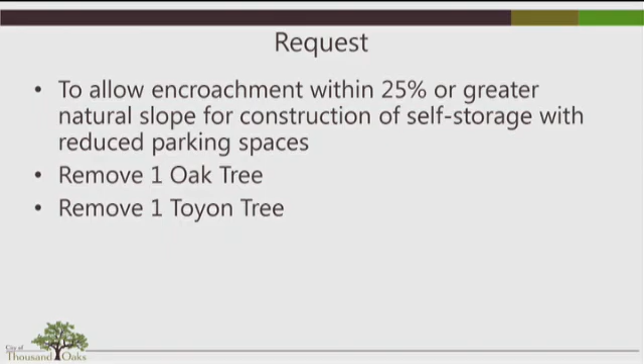This is a vicinity map showing the general location of the project. The site is located on the south side of Willow Lane between Hampshire Road and Conejo School Road. The 101 freeway is just immediately to the north of the project site.

This aerial photo shows the freeway on the north side of the property, where my mouse is right now. There's a children's facility to the east side, which is a school. On the south side is a vacant residential property, and to the west is another self-storage facility on a 3.52 acre lot. The storage building has a total square footage of 69,452 square feet.

This was approved in 1985 with no waiver of municipal code or other applicable guidelines granted. There are 3 utility poles on the property, numbered 1, 2, and 3. There are 4 oak trees.

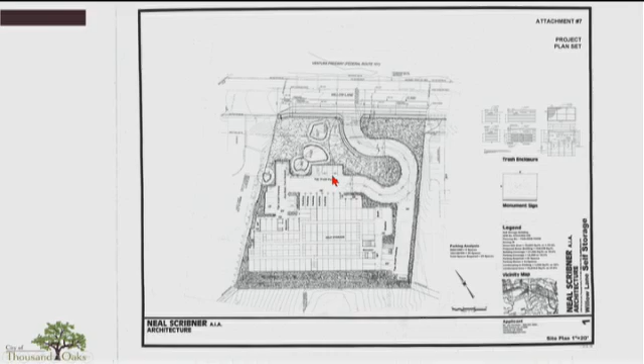This next slide shows the building elevation, proposed elevation. It will have a gray stone finish and 4 windows along the front facade of the building. The building overall has a rectangular shape.

This shows the grading plan for the project. There are step retaining walls on the driveway. These step retaining walls are required because a single wall, the required retaining wall here, would be about 14 to 14.5 feet high. So the walls were broken up into not more than 6 feet in height, with a planter in between.

This slide, along with the next 2 slides, will show a photo simulation submitted by the applicant. This one depicts a view from the northbound side of the 101 freeway. This is pretty much almost across from the subject site, the project site.

This next slide depicts the proposed facility from the southbound side of the 101 freeway. The building to the right is the PTS Furniture. The area between the proposed building and the PTS Furniture is where the existing self-storage facility is located.

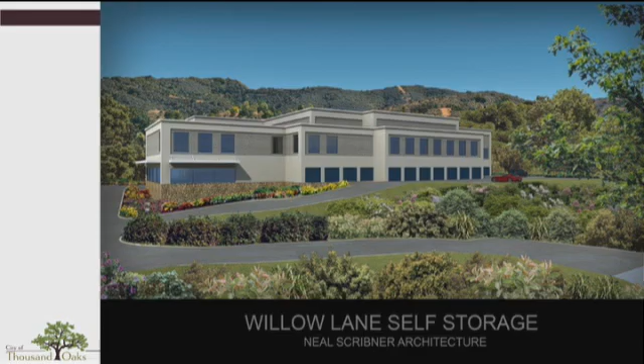As a background, the project site is zoned M1, and it's 1.63 acre in size with 3 single-family dwellings. As mentioned earlier, there are 4 oak trees on the site, 1 toyon, and another oak tree located within the right-of-way. There are 3 power poles, as we mentioned earlier.

In 2009, the City Council initiated the General Plan Amendment 2009-70407 at the applicant's request and authorized concurrent processing to allow the applicant to proceed with the General Plan and Land Use Amendment concurrent with a medical office building application. In 2014, the applicant requested to proceed with the General Plan Amendment and the zone change, so the zone change on this property was changed from RE to M1.

In early 2018, the property changed hands, and the owner, the current applicant, is now the new owner. The proposed building will have 100,138 square feet of building with 23 proposed parking spaces. By the way, the facility will have between 700 to 800 rental units.

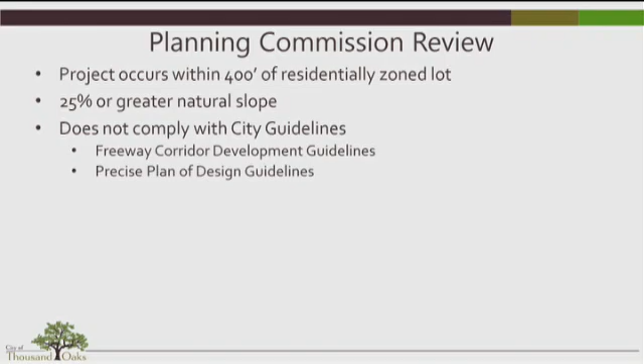Staff made an analysis of the project against the freeway corridor guidelines. The project does not comply with 7 subsections of the said guidelines, pertaining to silhouetting, extensive grading, visual interest, visual impact, facade exposure, building scale, and massing. Each of these subsections have been quoted in your staff report. The following slides provide an analysis of the project for each subsection.

For silhouetting, this is a picture you've seen before. The property is identified by 2 approximately 40-foot high power poles. The grading activity will lower this site by an average of about 20 feet. The building has a maximum height of 45 feet, and using the poles as a reference, it will be visible at approximately more than half the height of the poles. The building will not be blending into the natural backdrop because it will be sitting up around this area, and will have an adverse visual impact on the aesthetic conditions along the 101 freeway.

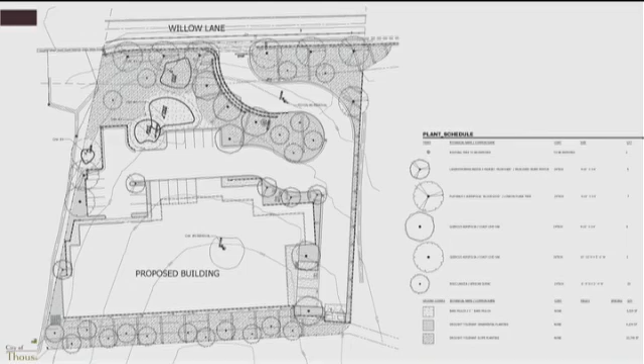Facade exposure. Section A5 requires buildings to be oriented at angles to the freeway to reduce the exposed facade, providing additional open space for innovative landscape designs and opening up views from distant features. The proposed building sits parallel to the 101 freeway without any feature angled to reduce the exposure. As mentioned before, the project does not provide additional open space for innovative landscape design to reduce that exposure. The landscape area is very narrow to support healthy growth of the trees.

Building mass and scale. Section B1 of the guidelines requires building architecture to make creative and innovative statements, but not appear as an imposition on the landscape. Buildings must be designed at a scale and manner sensitive to the terrain, reflecting integration of the architecture and topography. The proposed building has a height that is massive and imposing over the existing landscape. The building design is not sensitive to the site terrain and is not adequately integrated into the topography. The first and second floors should be stepped back to reduce visual massing.

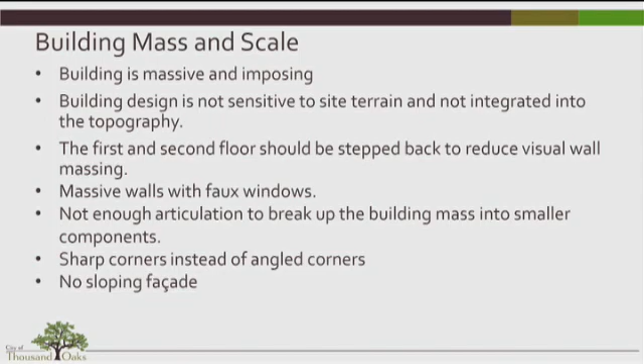Building mass and scale is part of the precise plan design guidelines. Section H1A of the said guidelines states that nondescript or boxy buildings without any recognizable architectural character, style, or detail are discouraged.

The proposed building, as you saw earlier in the elevation plans, is pretty square. It's got a lot of sharp corners and lacks architectural character. The faux windows look flat against the building facade, and the building lacks interesting features such as roof or any other articulation.

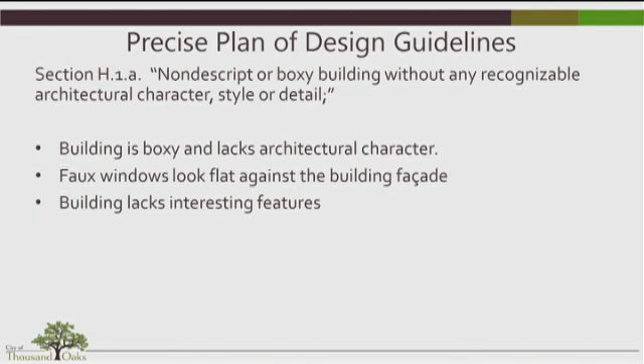As for the municipal code standards, for parking standards, commercial buildings that exceed 50,000 square feet require 2 loading and offloading spaces by code. The project requires 24 parking spaces. We calculated these spaces using the warehouse use as the parking demand for this type, which is 1 per thousand square feet for the first 5,000 square feet, so that's 5, and then 1 per 5,000 square feet for the remainder. That's how staff came up with the 24 spaces.

This project provides 23 parking spaces, which is one short of what is required. Staff does not support a waiver of the parking standards for the following reasons.

The project is too intense compared to the adjacent facility. The adjacent facility sits on a property that is almost twice the size of the subject site, 3.52 acres versus 1.63. The building next door has two-story and single-story elements.

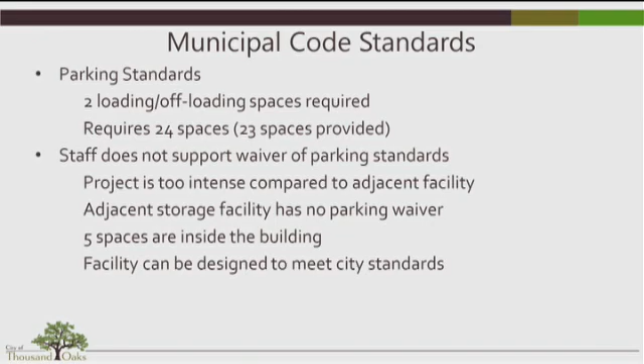In addition, there are no parking waivers granted for that facility. The building next door is 30% less intense than what is being proposed, on a site that is almost twice its size. There are also 5 parking spaces being proposed within the footprint of the building. Since the existing residences are being demolished, staff believes the facility can be designed to meet city standards.

As for grading, the 25% or greater natural slope occurs towards the rear of the property. The total natural slope area for the property is 12,570 square feet, which is about 17 to almost 18% of the site.

100% of the natural slope is being affected by this grading activity. Portions of the site will be lowered by 20 feet or so. It will require 31,750 cubic yards of cut and a net export of 31,500 cubic yards, requiring 2,250 truck trips using a 14 cubic yard truck. Off-site grading on Willow Lane will occur for driveway access, requiring an encroachment permit from the city.

Environmental review: this qualifies as a Class 32 categorical exemption under CEQA Section 15332, which is infill development, for the following reasons: it's consistent with the general plan designation, it occurs within city limits, and it is less than 5 acres in size.

The site has no value as a habitat for endangered, rare, or threatened species. Approval of this project would not result in any significant effects relating to traffic, noise, air quality, or water quality. This site can be adequately served by all required utilities and public services.

The proposed building is not physically suitable for the property. It does not fit, as indicated by a need for a waiver of the parking standards. In addition, the project proposed does not comply with several elements of the city's freeway corridor guidelines and the precise plan of design guidelines.

As we pointed out in our previous slides, the project also requires extended grading, altering the natural topography. The building will have significant visual impact because of its bulk and massive appearance. It lacks angled corners and sloping facades to break up the facade into smaller components. The project does not provide ample landscape area to reduce its visual impact from the 101 freeway.

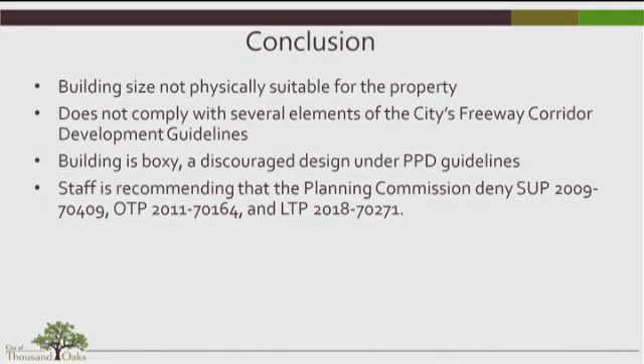For this reason, staff believe that the project will have an unmitigated, significant visual impact. Therefore, staff is recommending that the Planning Commission deny SUP 2009-70409, OTP 2011-70164, and LTP 2018-70271. That concludes my presentation, and staff is available to answer any questions you may have.

Thank you, Mr. Chua. That was very thorough. I appreciate that. Are there any questions, Commissioner? Thank you, Madam Chair, and I'll also add my thanks, Mr. Chua.

I appreciate very much that as a city we have architectural guidelines, and I very much appreciate your report that lays out where the project is in compatibility with those guidelines and where, as currently constituted, it is not. So thank you for that. I just have two questions, quick ones.

The first is that you mentioned there is a right-of-way in front of the property that is not part of the applicant's property. My question is, who owns that land? That portion is owned by the city. So that driveway that currently goes up to the property is city land? Yes, it is.

My second question has to do with two areas you touched on in your report. The bigger one is a public safety question having to do with brush clearance. There are areas where you mentioned relatively narrow strips around the proposed building, and this is problematic both for potential growth of future trees, but also for brush clearance, in that the applicant would be required to offer easements to adjoining property owners to do the brush clearance.

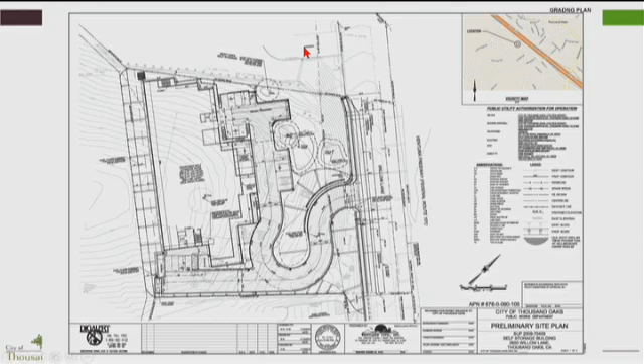I noticed we had some materials before us. I'm assuming this was from the applicant and not the city? Yes, it is from the applicant. Have you seen these at all? Yeah, I've brushed through it.

Aside from the people here to speak presumably later, did you get any neighbors' comments, any involvement from the public as to this application? I spoke to an individual who represents the Westlake Storage next door, and he's concerned about the grading. We initially spoke to it, but he did not give me any written statement about this project.

Is there any concern by virtue of the fact there is a public storage next door? Did that go into your evaluation at all, the possibility of another storage facility next door? No, this project is being evaluated on its own merit, not because of the presence of a self-storage next door.

And lastly, in your conclusion on the written documentation, you indicated that to the extent we would support this, we would need to establish findings to justify approval. Is that from a factual standpoint, or what kind of findings would you be looking for?

As mentioned in the staff report, the Freeway Guideline Corridor Resolution standards can be waived by the approving authority, either the Planning Commission or the City Council. So if the Planning Commission decides to approve this project, they will need to provide findings that support the project. They will state what waivers are being granted specifically, and indicate that the project either complies or waivers are being granted in certain aspects of the project.

As far as the height of the building is concerned, I apologize for that. That 45 feet is incorrect. I simply went by the project plans on the screen, which indicated 45 feet, and I went with the worst case scenario at 45 feet. So for the record, I'll correct that it looks like it's 27 feet plus 6 feet, or 9 feet, so that's 36 feet.

As far as the PTS furniture, I'll give a general answer to most of the buildings shown by Mr. Scribner in his submittal. The one thing not being mentioned is that this site sits much higher than the surrounding properties. The PTS furniture, the Westlake Storage, the Lowe's furniture, Lowe's particularly, is sitting on a previously graded pad. The Sage Mountain project, approved by the Planning Commission a while back, sits on a drainage that was filled to provide the pad for it. It's not a case where a hillside was graded to reduce the height of this pad, which is against our freeway corridor guidelines.

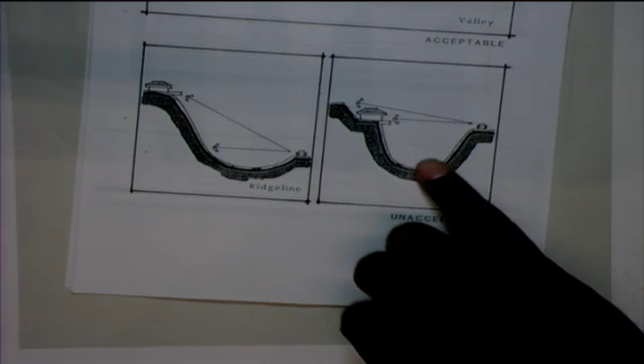In Mr. Chua's presentation, he showed a section of the grading plan showing a distinct portion of the hill being removed to create a pad for the building, parking, and driveway facility. As you can see in the guidelines, that's most like the diagram showing unacceptable development along the freeway corridor. The whole purpose of the freeway corridor guidelines is to maintain the hillside and natural view in their current state to provide visual interest. If you're altering the hillside, that's what we're trying to get away from.

And the architecture for buildings in this particular area is supposed to be designed to complement and enhance the hillside, meaning they step up.

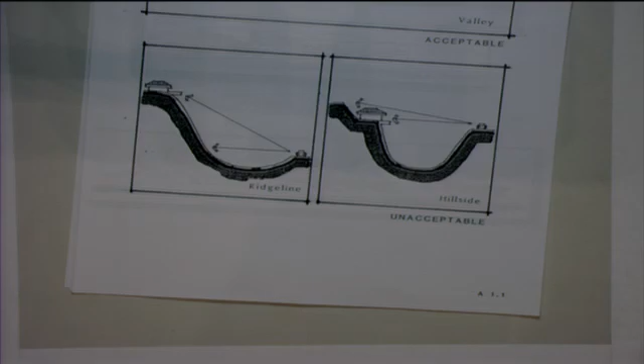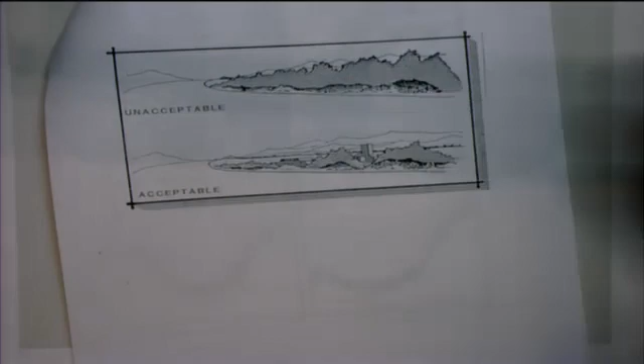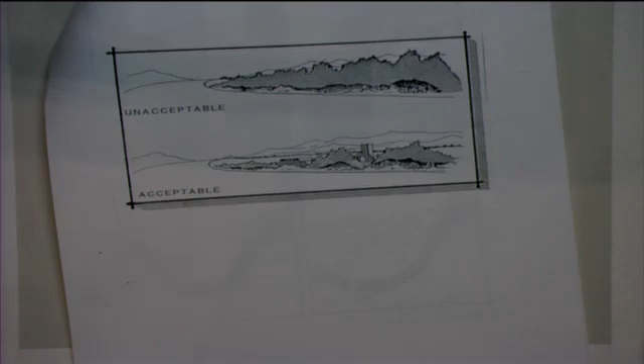One additional diagram you saw in the presentation, which I believe the applicant provided in your material, shows landscaping. What is pictured in the top portion is unacceptable because it blocks the hills. The landscaping planted along the freeway corridor is not intended to mask the hillside. In the acceptable portion shown below, you have landscaping but you can still see the buildings. The point is that landscaping should enhance the development as part of the architectural design, done in such a way that you can still see the hillside with the building and the landscaping, without cutting into the hillside or masking the view.

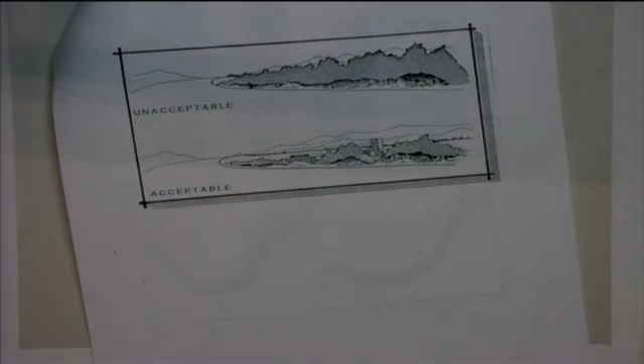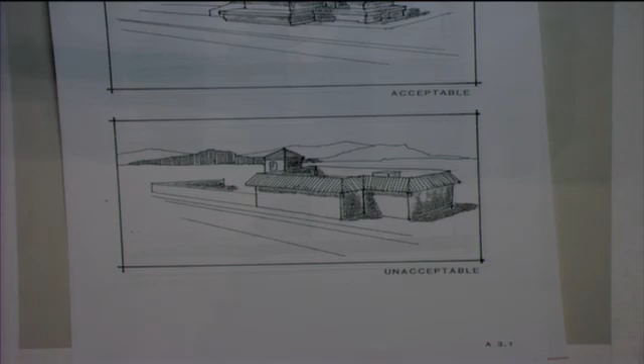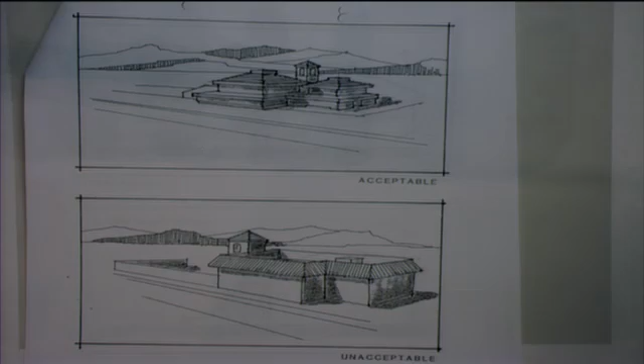Mr. Chua went into great detail in terms of architecture. Towards the bottom of this image, it shows a boxy-like architectural style, which Mr. Chua depicted as unacceptable for the freeway corridor. What is acceptable is shown towards the top, where you have a building with a wedding cake concept that steps back at each stage, providing architectural articulation, with a roof structure that doesn't mask the hillside behind it. These hillside guidelines are intended to go above and beyond what you'd ordinarily have in the code, given the highly sensitive nature of this particular location.

There were a number of projects mentioned, such as the Lowe's project. That is visible from the freeway, but as you drive by, you see the hillside in the distance. The Lowe's site was also previously disturbed—there was a previous development there that was removed, and Lowe's is being built on that. In terms of encroachment upon the hill, it's a very small portion at the rear of the building, which is also at the bottom of the hill, so it didn't change the visual character of that particular neighborhood.

So those are some of the differences that Mr. Chua pointed out in his staff report and presentation, and that he brought up in the rebuttal to provide context to what you're reviewing here this evening.

Excuse me, Mr. Parker. Can I ask you to show me one thing while you're up there on the overhead? I just want to be clear about that adjacent parcel that the owner would like to move the dirt to. Can you show it on one of the diagrams, one of the site plans, so I can see which parcel they're talking about in relationship to the one we're talking about now?

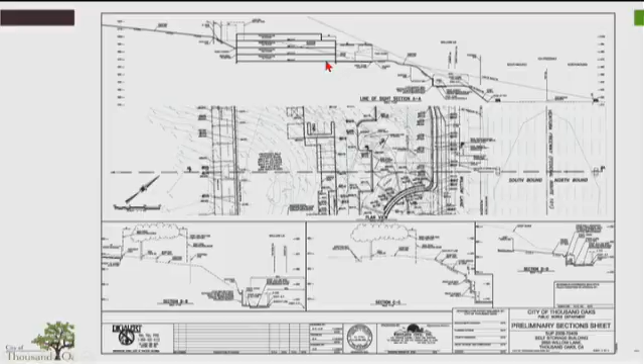So they're going to drop probably as high as 30 feet back here, 35 feet on this side, and about almost maybe 10 feet here. So I average it out to about 20 feet. All right, but you're characterizing, even with the 20-foot reduction, that it's still higher than the surrounding properties? Yes, it is. Right, okay, thank you.

And then also, if you're not able to answer this question, please say so. I'm putting you on the spot as a tree expert for the moment, but we've talked a bit about trees, and there's some lack of clarity as to the size of the trees that would go in, whether they're 24-inch or 72-inch box, and maybe it's not decided yet. But whatever the size of the box, are you able to estimate how long it would take for the trees to reach the height shown in the simulation provided by the applicant? No. Okay, I appreciate that.

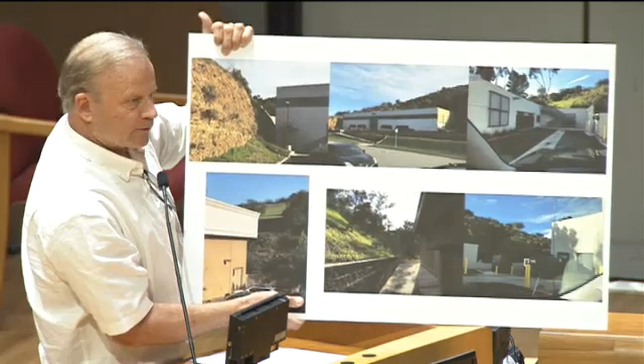Around the corner, there's a building here, a concrete tilt-up, and you can see it's cut in. This is like 30 feet tall here, and it's cut into there. This is around the corner on Conejo Ridge, but it's right there, and it's backed up to us. We're right behind here.

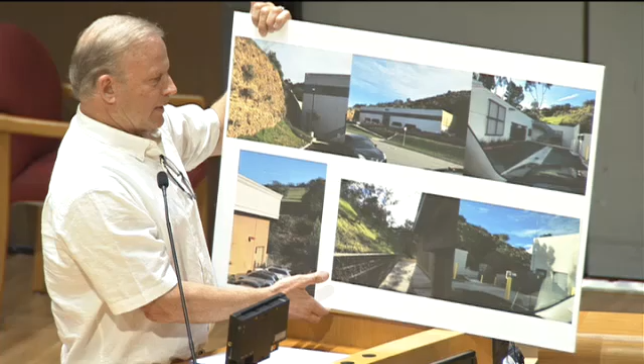So on the hill, that's kind of what you do to mitigate and make it fit into the hill. And that's the way we interpret the scenic view corridor, and also our building, as we showed you—it's not a flat surface. We do have different levels and the roof articulates back.

And like Neil was saying, it's 170 feet from the first lane of the freeway, the scenic corridor. You can't see this building except from the 10th lane, the one on the very far side. You may see some at the very top, but at this angle you can't see it from that side. And when we superimpose the buildings here, this is exactly the way it's going to look.

It sounds scary being 4 stories, but the PTS furniture is 2 stories, but it's the same height because they have much taller ceilings and a big parapet on the roof. So they're still at around 35 feet. We're 9 feet from floor to floor, so inside it's a little over 8 feet. We use a concrete floor, about 5 inches. So it's 9 feet, 18, 27 would be the roof on the first part, and then 36 in the back.